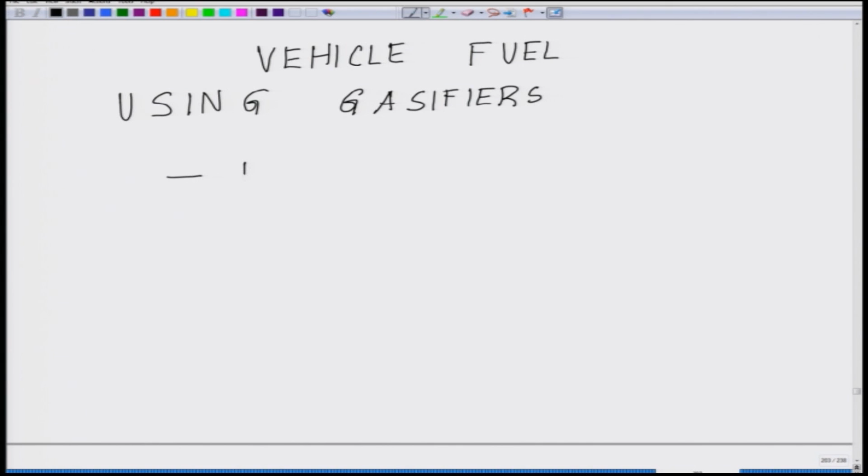The use of gasification to provide fuel for motor vehicles from biomass is very well proven and documented. This is a very time-tested technology, well proven and well documented.

The last 100 years of literature has several such documentations.

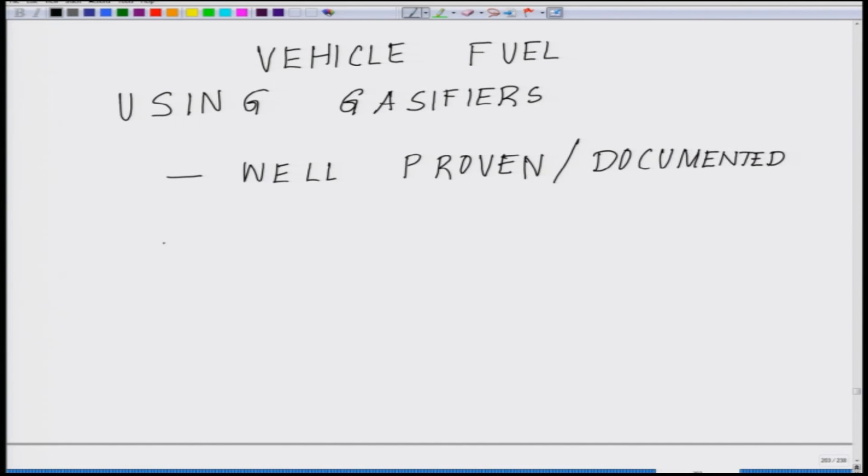It all started during the 1920s in Sweden. This is post World War I, where the technology was really picking up, followed by 1939 to 1945, which is World War II.

This was the time there was a shortage of petroleum products in Europe, which led to the need to develop alternate technologies to provide fuel for motor vehicles.

If you look at the 1920s, we are almost approaching 2020 now, so this technology is very much there. But what happened post World War is important.

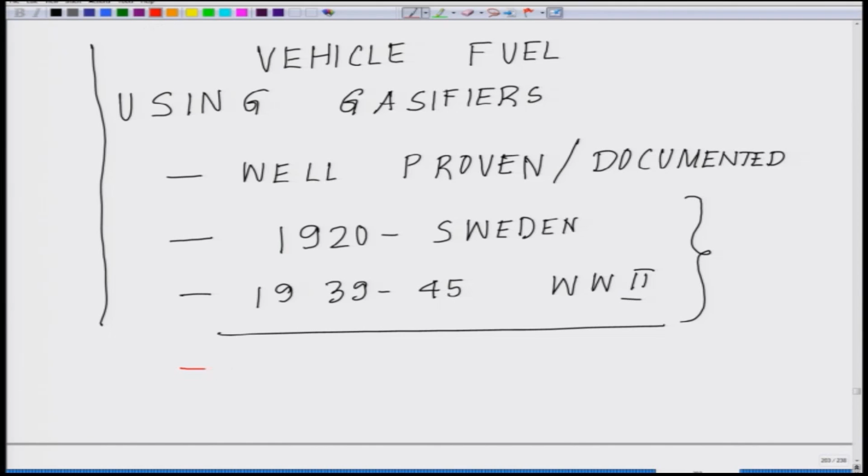Post World War, you are getting a lot of improved fuels.

And due to these improved fuels, this technology somewhere got lost.

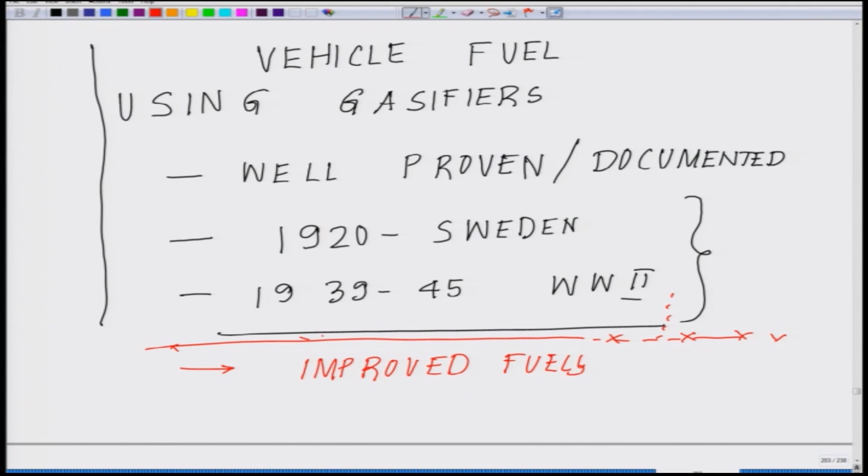Post Second World War, there was not much investment in this technology, because you were getting very high quality, very refined oil for different kinds of aviation and transportation purposes. So this technology kind of took a back seat.

But today let us revisit some of the pros and cons of this technology. Let us jot down the salient points.

The salient points of this technology: there is this wood gas technology, there is hardly any bottleneck, we know this technology well.

It leads to low calorific value wood gas.

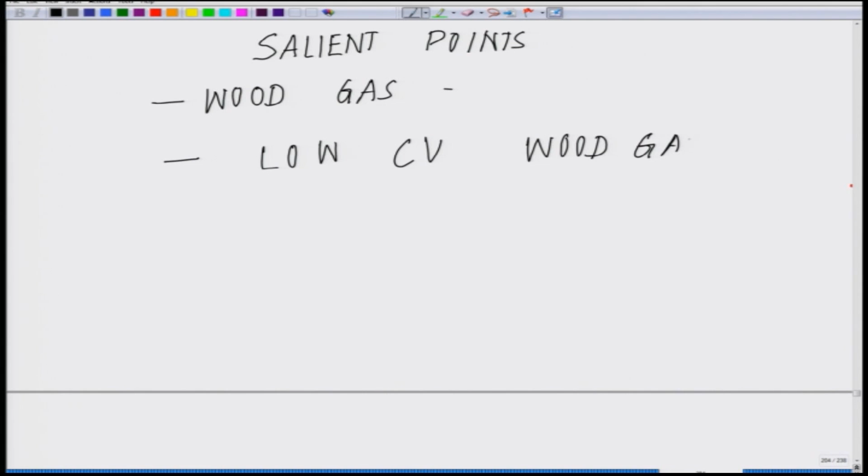What are the requirements to drive a vehicle using this? It requires a high compression ratio.

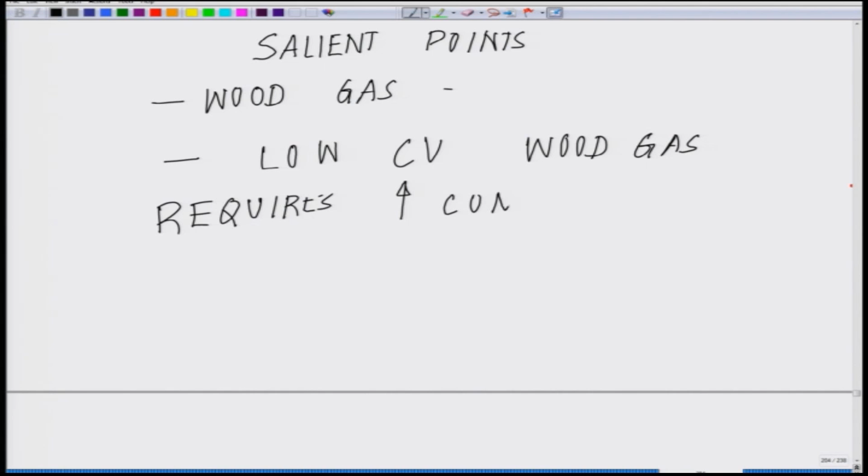Remember when we talked about compression ratio while discussing engines, a high compression ratio is needed to provide the same engine performance.

To provide the same engine performance.

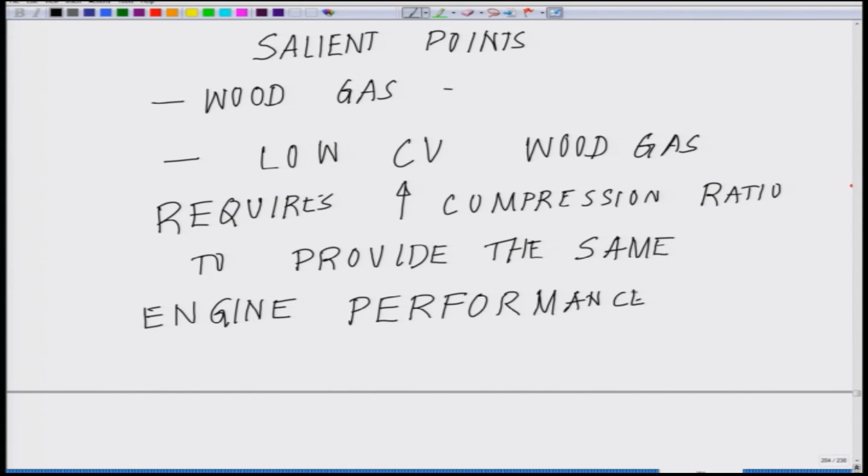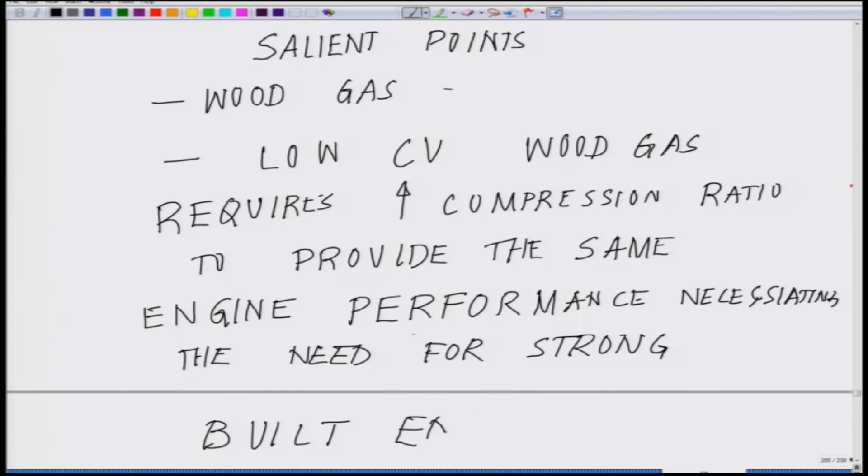Such engines are mostly very similar to diesel engines. So diesel engines come very handy for this kind of situation.

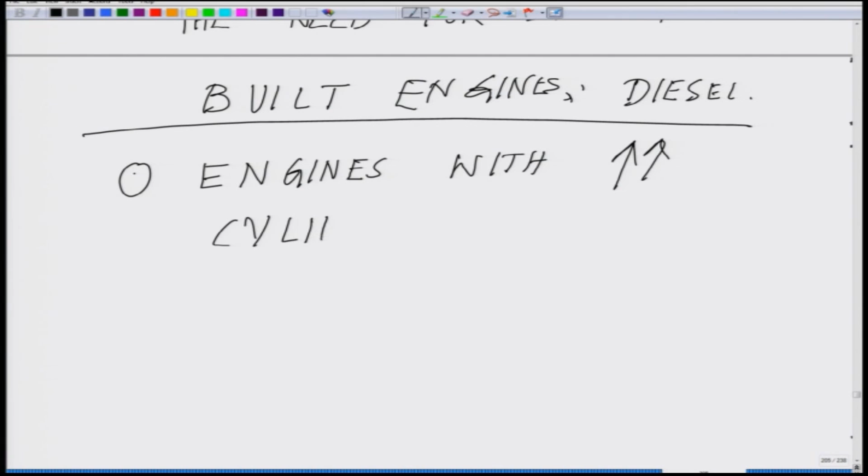The second aspect is that engines with large cylinder volumes are needed, engines with very large cylinder volume.

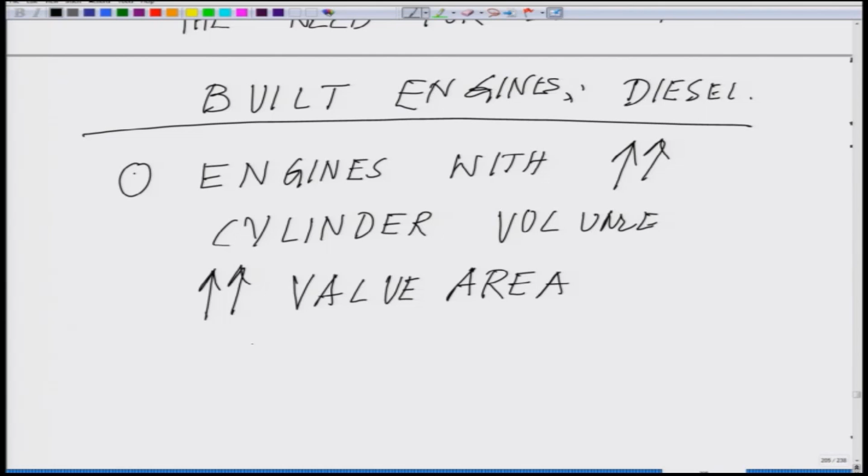A larger valve area is also needed, operating at constant load.

Operating at constant load.

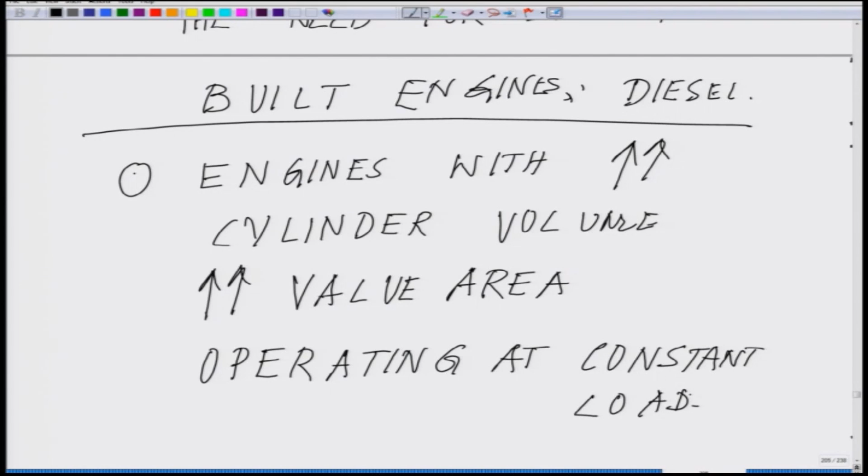This gives optimum power output. This is very important, so it is basically used in stationary industrial engines.

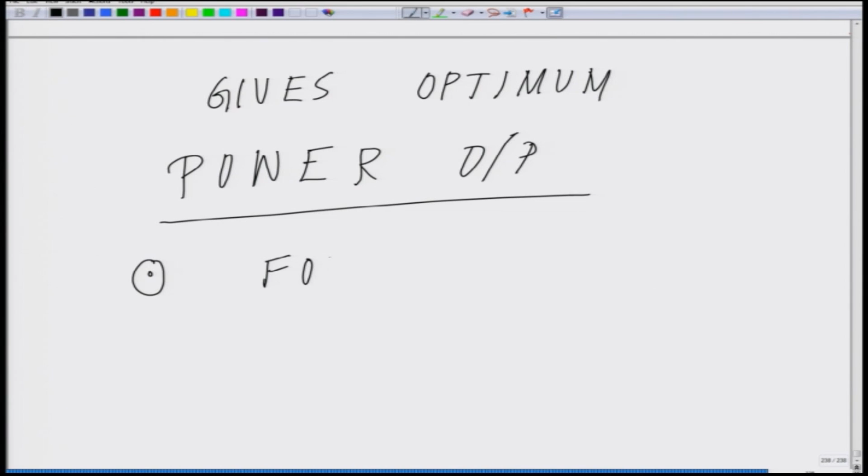Secondly, small high-speed engines like 2-stroke engines are not very successful in this kind of setup.

2-stroke engines are not very efficient in this situation, whereas 4-stroke engines are fairly successful for this kind of wood gas system.

Let's look at how these are made. I will give you a flow chart of gasification to produce fuel from the gas for gas engines.

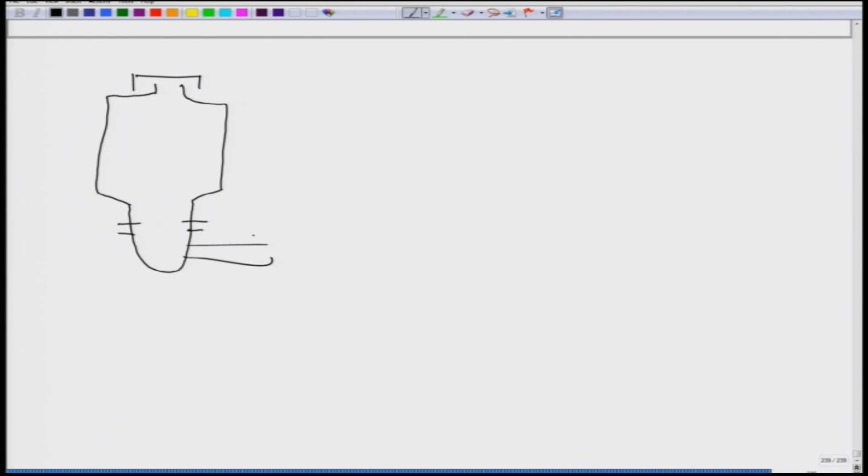So you have the wood chip hoppers which are present here, and you have the air inlet. This is the hearth area.

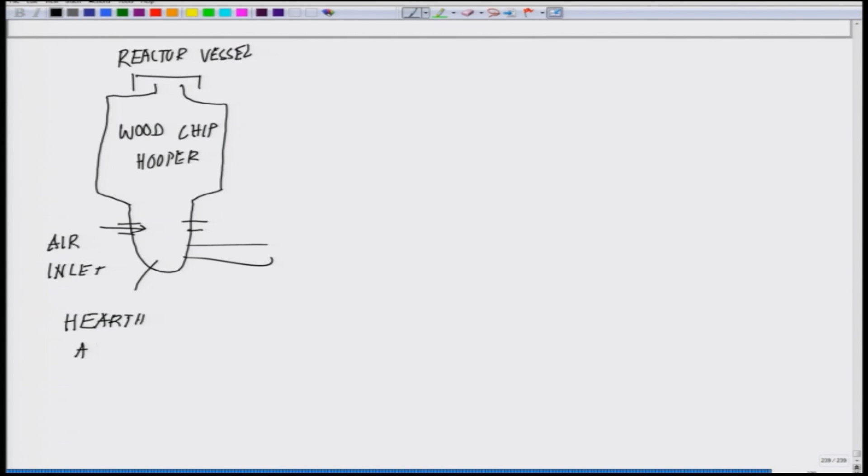And here you have the blast tube.

This is what you can put in the front of a car, right? And here you have the cyclone sitting here.

From here it goes to the cooler area, or the coolant, where you are cooling down the gas, and from here you move to the purifier zone, where you have the gas-air mixture conversion.

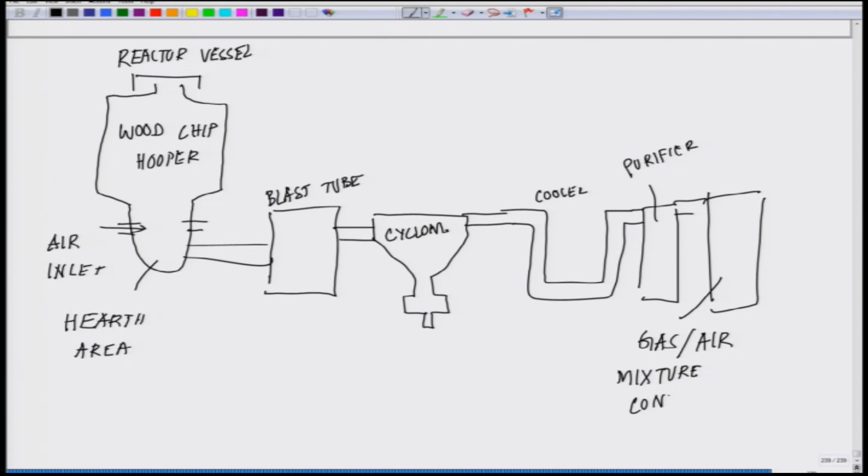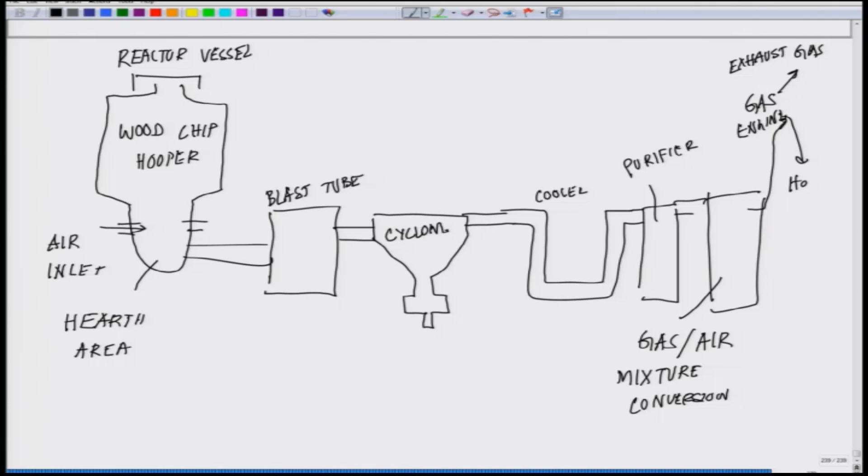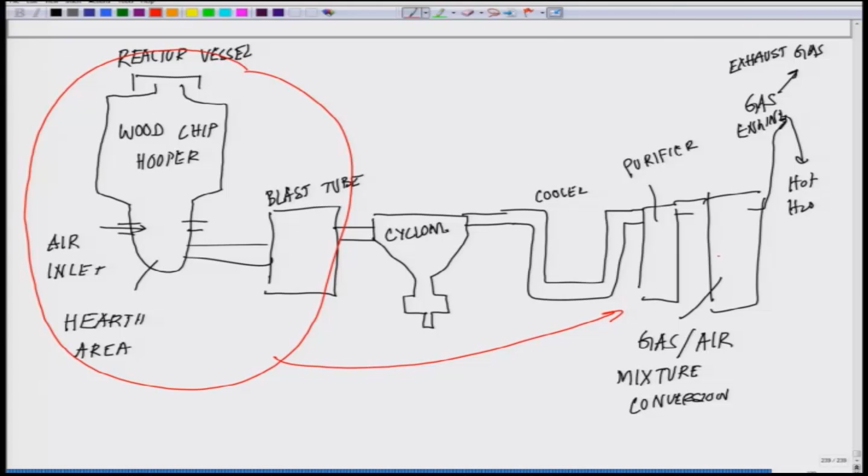So, in order to understand this, recollect how we did this. This goes to the gas engine, here you have the exhaust gas, and you have hot water. So if you look carefully, this is where the reaction happens, this is where the gas is getting generated, and this is where you run the engine. So in one unit, say for example this is the front of your car, you could have this whole setup out here, and there are cars developed using this whole process where you run the car using these kind of gasifiers.

But the challenge is that you get a low calorific value fuel. Obviously the power of the engine will be less, and as mentioned earlier, these can only run two-stroke engines. So automatically you have to compromise on speed and efficiency. On top of that, there will be charring problems, ash problems, and the water coming out will have a lot of contaminants, so you have to purify this water, and of course you have the exhaust gas coming through.

So overall this is how this whole technology of 100 years functions, and there are different ways you can do it. So this is one technique where you are doing the thermal route.

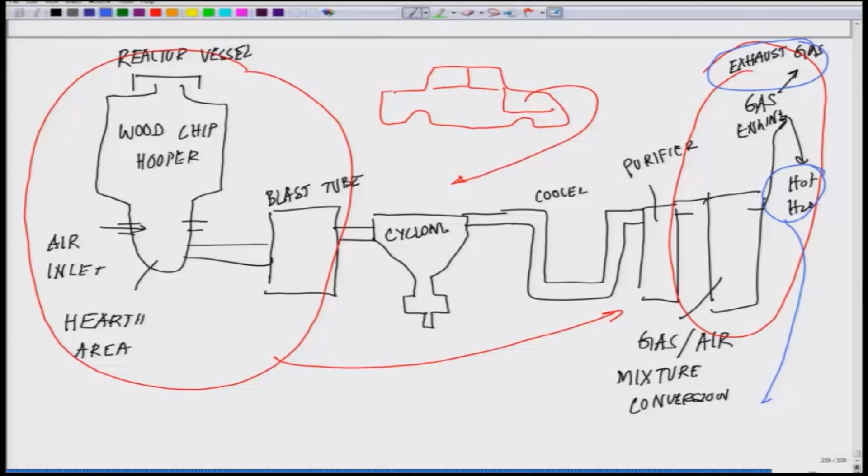The other way of gasification is the biological route. So very briefly I will touch upon that biological route of gasification. In the biological route, instead of using high temperature, you utilize two technologies: the fermentation technology, that is one route. The other route follows anaerobic digestion.

What we mean by anaerobic digestion is essentially there are a series of bacteria, microbes, fungi, which in the absence of oxygen work on biomass. They generate a lot of gas, especially bacteria like methanogenic microbes which produce methane and these kinds of things. So this is another route by virtue of which you can generate a lot of gas.

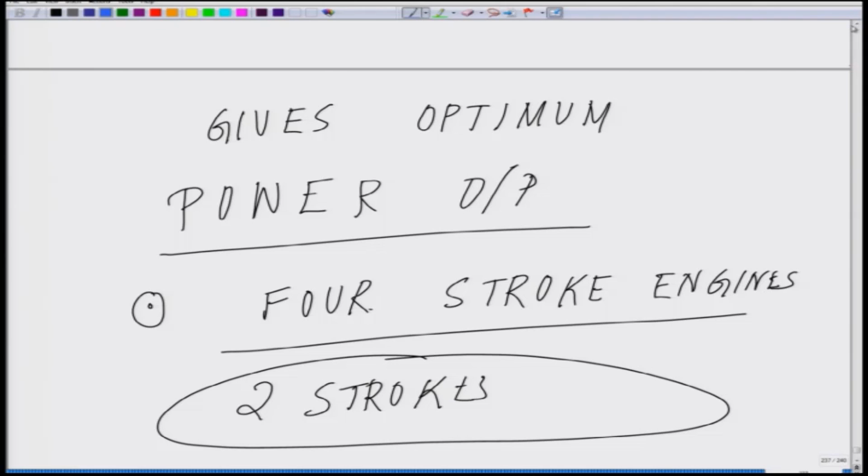So in the beginning of gasification I told you one is the thermochemical route, which we have extensively talked about, and we also talked a little bit about biogas plants earlier. Most of these techniques follow a simple idea: you have a biomass which has to be degraded, and you could get liquid based fuel, solid fuel, or gaseous fuel. For gaseous fuel, you could either follow the microbial digestion route or the thermochemical route, depending on your economy and how you want to recover the system.

The thermochemical route is very well established. The microbial route we know, but scaling it up is the current area of research which is going on.

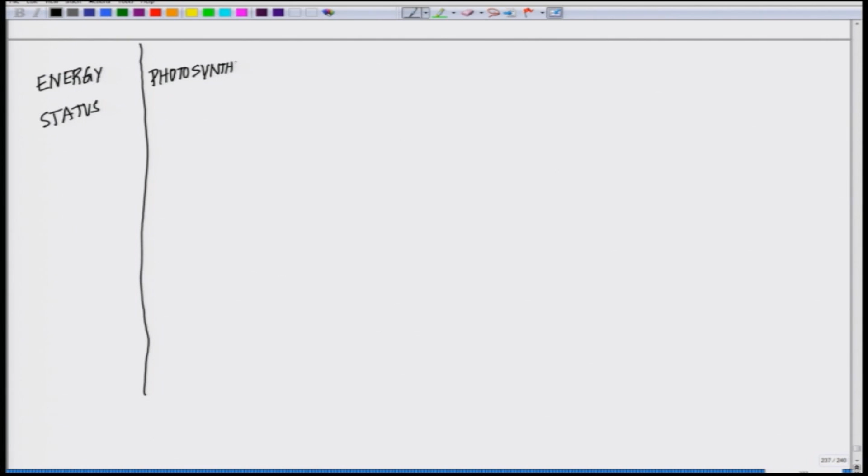So this brings us almost to the end, where let us look through what all we discussed. We started our journey with the energy status and the context of bioenergy. We talked about that in the very early part, followed by photosynthesis, which we discussed very extensively because this is the route which leads to the formation of biomass. This is where all the carbon dioxide comes in and, through the green machinery, is converted into biomass. This was one area we investigated very profoundly, the biomass formation.

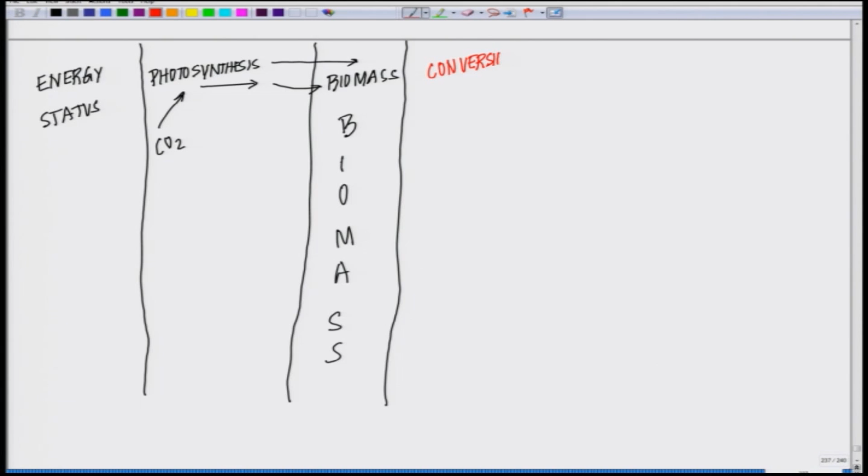Next, we talked about the different conversion processes, the technology part: conversion of biomass to solid, liquid, and gaseous fuels.

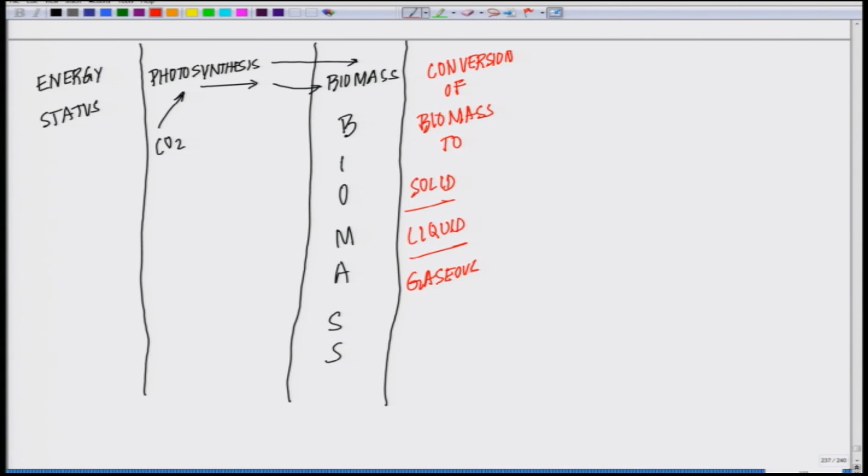By no means is this course fully complete, because whatever you try, there will be certain parts which get missed. But what is important is where I put the maximum thrust, on two aspects. One is this aspect where I invested a lot of time for you to appreciate why we needed to increase the photosynthetic efficiency of the plants growing on earth, and the second part, the overall conversion technologies at our disposal.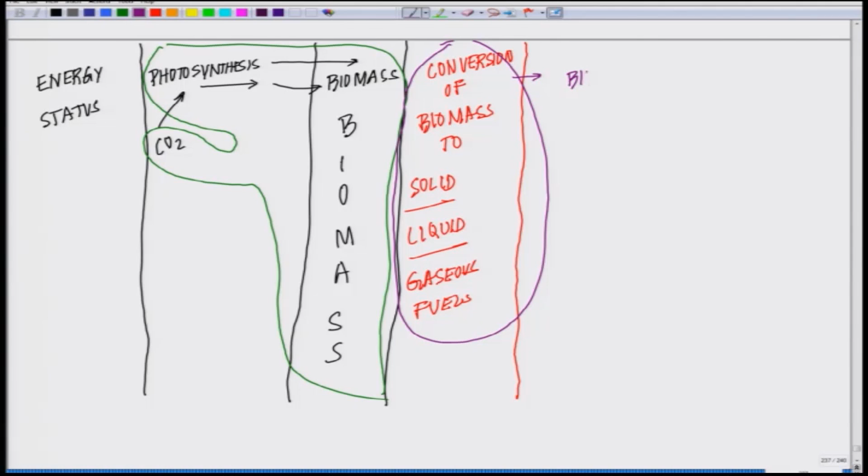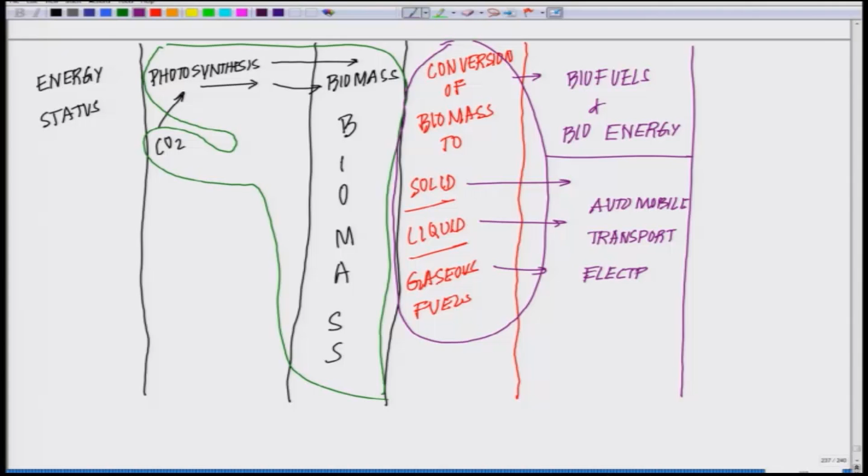This leads to the next part where we talked about the different kinds of biofuels, which we discussed partly here and there throughout the conversion process, biofuels and bioenergy. And of course we talked about solid, liquid and gaseous fuels, and where they are applied, in terms of automobile transport, electricity generation, and so on and so forth.

And all these processes, if you realize, lead to emission of CO2, and this very same CO2 again comes back to feed this cycle. So you are realizing it is a continuous process which is happening.

So based on this energy status, we moved on to the whole area of bioenergy with a specific stress on bioenergy. Then we moved on to the basic process, photosynthesis, to biomass conversion, then again the conversion of biomass to solid, liquid and gaseous fuel. Here I have highlighted time and again that nature has also done this process through natural geological eras.

Nature has already formed natural gases, petroleum and coal - these are nature's analog. What man is trying to do is achieve this whole conversion within his lifetime. This process must have taken nature millions of years, through geological eras, converting biomass at high pressure and high temperature into different kinds of fuels. Now man wants to understand all this and replicate it in a synthetic condition, whether through a synthetic route or synthetic microbial route - essentially a man-controlled route.

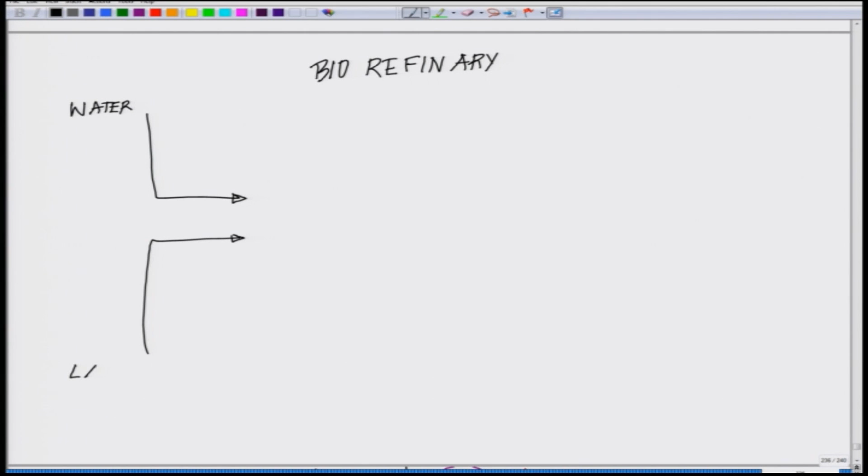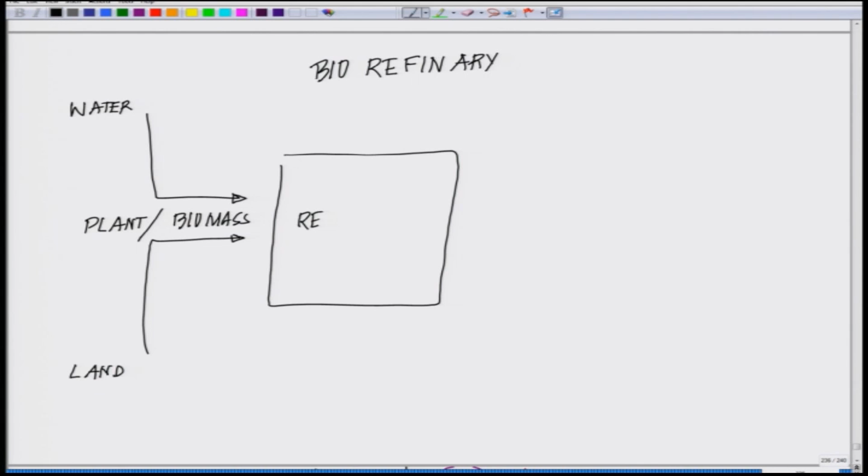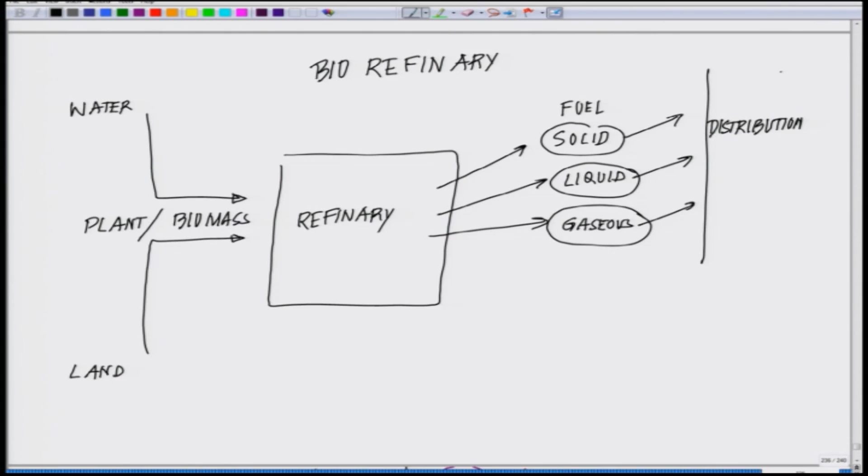From different sources - say, plant sources coming from water bodies, water and land, all the plant sources and other biomass sources - they come to one platform which is kind of a refinery, where all are converted into different kinds of products: solid fuel, liquid fuel, and gaseous fuel, and then distributed for different kinds of application. Whatever exhaust we get is again fed back in some way into nature in order to convert it into biomass.

This whole concept is what will be the modern day biorefinery, where most of the biomass-to-fuel conversion process happens in a very systematic, man-made, controlled fashion. Here I will highlight a few additional aspects.

At the end there will be two small capsule videos, as I promised, showing how the pyrolysis process could be used to make graphene-like material where electricity production takes place, and how to store it. There's another aspect I've added where you can use natural fibers - these biomass sources - as thermoelectric materials. If you take a natural fiber and expose it to waste heat, it could generate sufficient electricity which could be stored. This is very preliminary research, but I wanted to give you a glimpse of another area: thermoelectrics and energy storage materials which could be derived from different biomass.

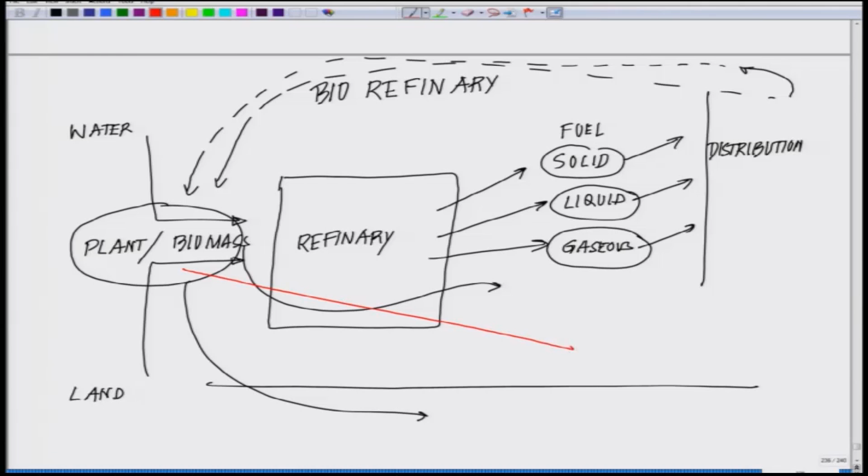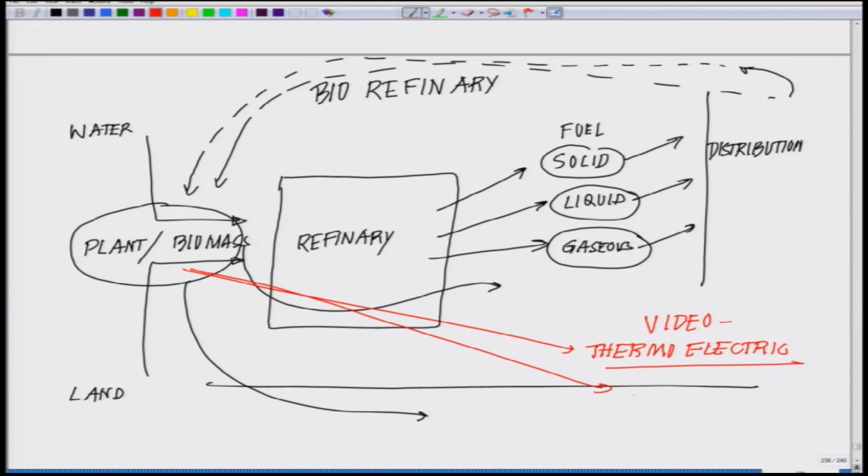Thermoelectrics - this isn't fully part of the course, it would be too exhaustive, but I have given you some video modules to help you appreciate it, covering energy storage materials - the different kinds of materials we have talked about in the video module.

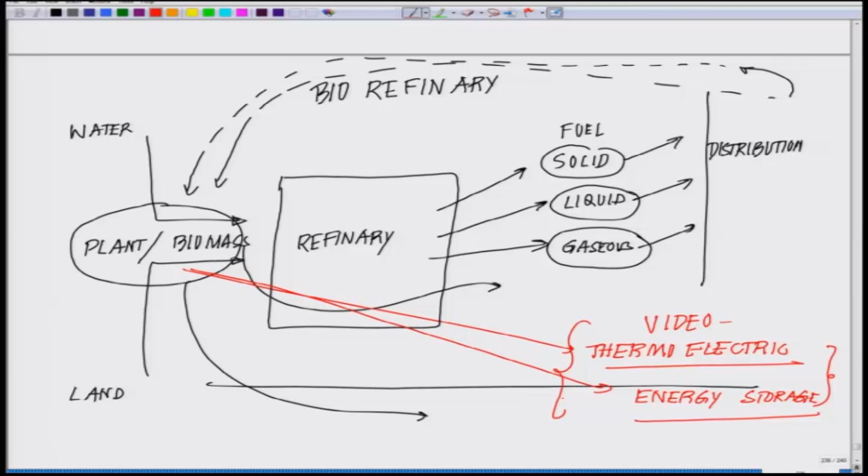That pretty much brings us to the end of the course, where we started from the energy status. We talked about photosynthesis, then photosynthesis-to-biomass conversion, and then the conversion technologies available to us. We talked about the design of engines, and finally we summed up the whole thing and talked about what the future holds.

It was definitely a great learning experience for me, and I hope it has helped you get an overall picture of bioenergy. Wish you all the best.